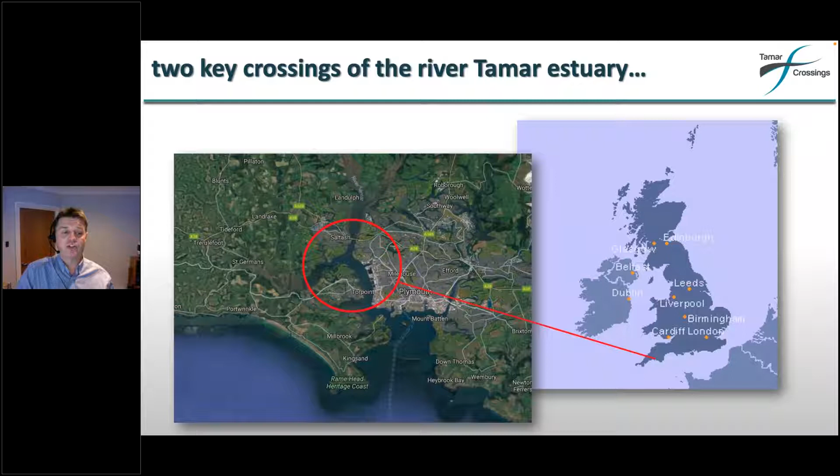The nice thing about people attending virtually is you're probably stretched across the country. So for those who don't know where we are, we're in the southwest of England, on the outskirts of Plymouth, right on the Devon and Cornwall border. The bridge is on the upper reaches of the Tamar, runs between Saltash and Plymouth, and forms part of the A38. And then the Torpoint ferry is further south and links very nearly the city centre of Plymouth with southeast Cornwall. Both really important crossings of the river locally.

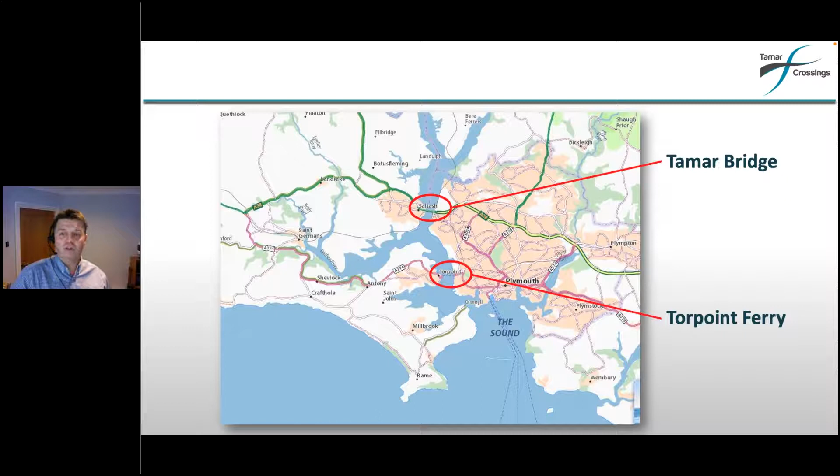The next nearest crossing is probably 6 or 7 miles upstream, which is a 14th or 15th century stone bridge. Can't really take HGVs or the volume of traffic that the A38 or Torpoint ferry can. So locally, very important crossings. There's some statistics. Tamar Bridge will take about 16 million vehicles a year. Income from tolls, and we'll talk about that in a minute, is nearly 10 million.

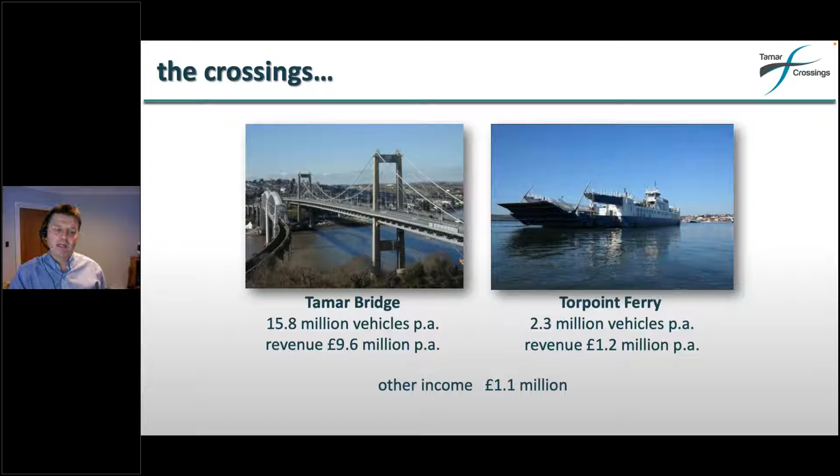Torpoint ferry, about 2.3 million vehicles with thousands of foot passengers and cyclists, and revenue is about 1.2 million a year. We believe the Torpoint ferry is certainly the busiest inland waterway in the UK, potentially in the world. We haven't tested that, but it's certainly a very busy inland waterway. Other income is around about 1.1 million.

Now, we're a bit of an unusual beast, really. We are Tamar Crossings, that's what we're known as locally, although we are actually the Tamar Bridge and Torpoint Ferry Joint Committee. That just doesn't quite roll off the tongue as well as Tamar Crossings. We're established under primary legislation, that's an Act of Parliament. The original Tamar Bridge Act was 1957, various changes to that, the latest being 1998, when the bridge was strengthened and widened, and that strengthening and widening scheme required an Act of Parliament to implement.

Now, originally the 1957 Act required the creation of the Joint Committee, and central government essentially wouldn't fund the crossing at the time. So the two local authorities, Plymouth City Council and Cornwall County Council, as it was then, sponsored the bridge, got the Act through Parliament, and that Act required the formation of the Joint Committee to operate the new Tamar Bridge, and it also at that point in time took the Torpoint ferry into ownership, which before was wholly owned by Cornwall Council.

So we're primarily self-funded from toll income. Just going back to the previous slide, there was a little bit of extra income there. That comes from various way leaves and a very small contribution from Highways England for operating part of their network. The income is ring fenced for the operation, maintenance and improvement of the crossings, and those three words are really important, and we'll touch on those in a short while. And it's also worth noting that the ferry operation is heavily subsidised from bridge income, much more expensive to run, but doesn't have the same volume of traffic.

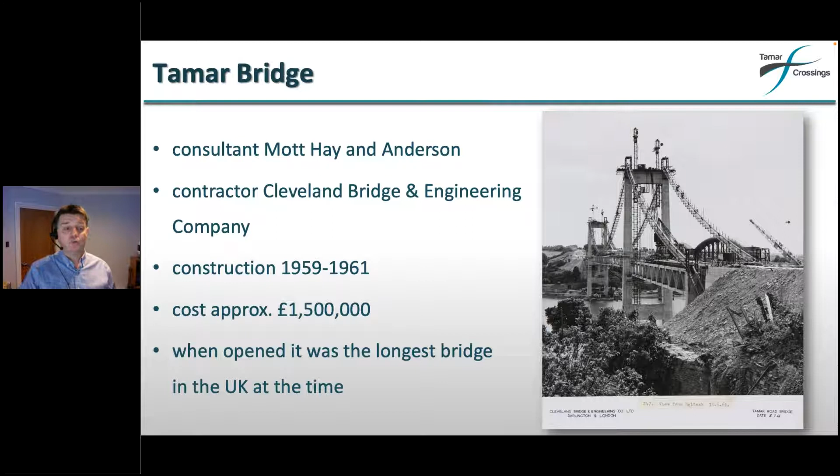Construction cost at the time was £1.5 million, and when it opened, it was the longest suspension bridge in the UK at the time, and certainly one of the biggest post-war projects around. Again, nothing particularly striking about the bridge. It's a fairly standard suspension bridge. I don't know how many engineers are out there watching, but it's a symmetrical bridge.

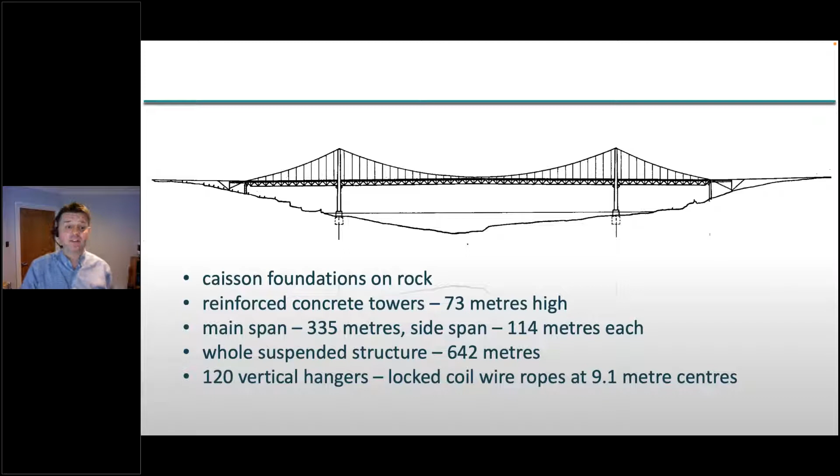Foundations in the river on caissons, reinforced concrete towers, which are about 73 meters high. And then we've got the main spans and the side spans, 335 and 114 meters. And the whole suspended length is 642. So to put that into some context, Humber Bridge, they're about 1,400 meters long, longest bridge in the UK right now. So we're small in terms of bridges, but as I say, it was the longest at the time in the UK, and we still have the same challenges as other bridges around the country.

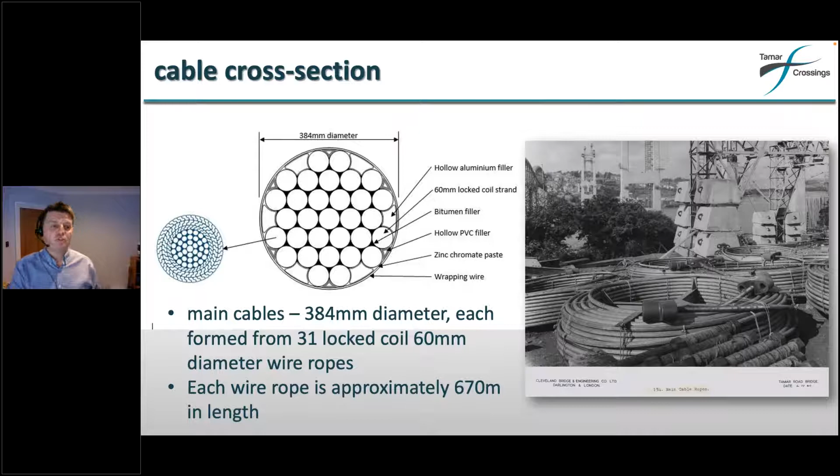Got a slightly unusual cable, main suspension cables, in the way they were constructed. And I've really put this in just for some detail if you want to look at the presentation afterwards, rather than talk about the detail of how the bridge is actually constructed.

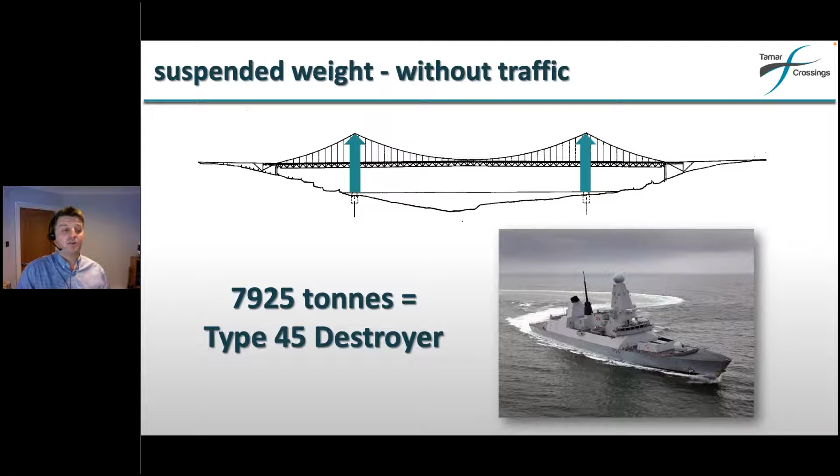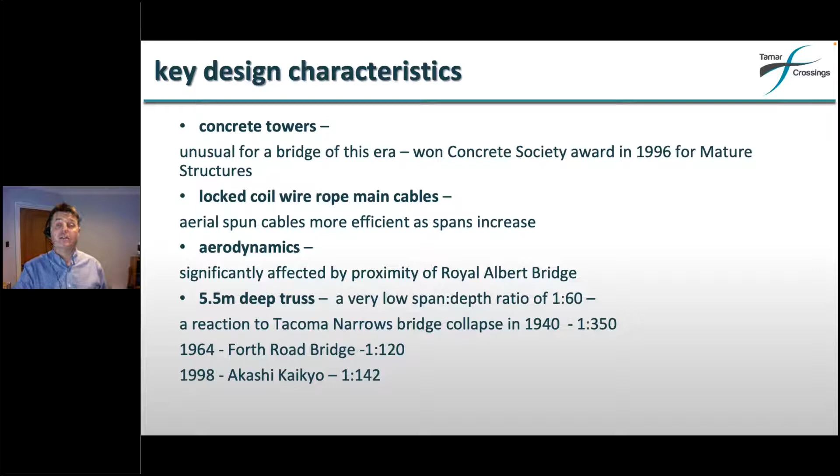And as we're a naval town, very close to Plymouth, with a big dockyard just downriver, that puts the weight of the bridge into context. So we are around about 7,900 tons of suspended weight. That's the weight of the structure hanging from the main cable supported by the towers, which is equivalent roughly to a Type 45 destroyer. And again, I won't cover too much of the key characteristics, but I'll let you have a read through those after the presentation, as well as these photos.

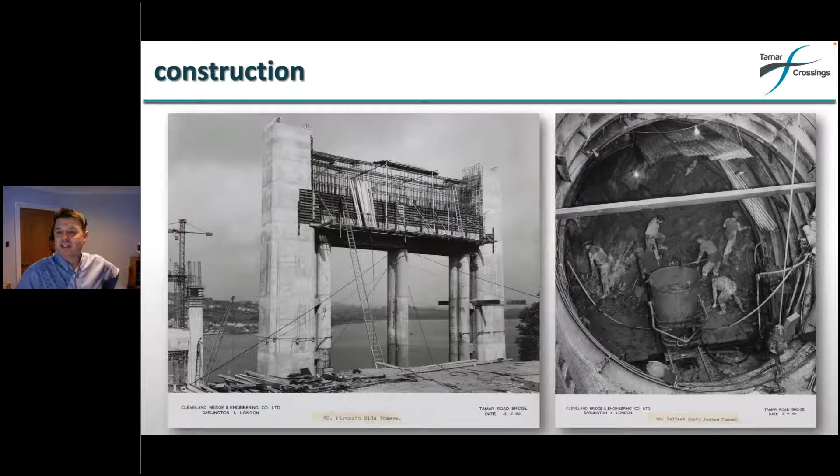Although I do like to put in some old construction photos from time to time. It's good to look at how the bridge was constructed, and it's also good to remind ourselves how far we've come in terms of health and safety. If you look at some of the working practices going on in some of these pictures, it's brilliant. I particularly like this one with the trusses.

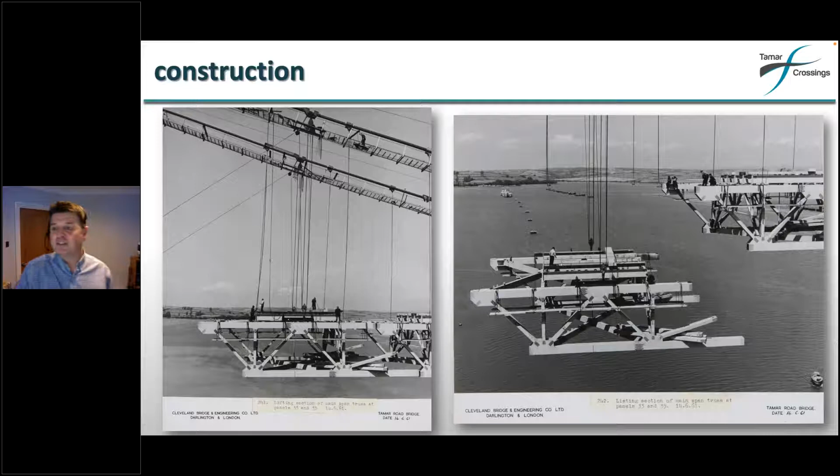This is part of the steel truss being lifted from the river, and you can see the workmen there sat minding their own business, watching the world go by. Flat caps, no harness, no hard hats. You know, it's a fascinating world, and certainly construction has changed enormously since the 1950s. So I'll let you have a good look at those photos yourself in your own time.

So really what we're here to talk about tonight is planning major projects. I'm going to focus on the resurfacing project, but really the principles I'm going to talk about in a few minutes apply to all our projects, almost regardless of the scale and size of them or duration.

But like I say, we'll focus specifically on the resurfacing, which is our most recent project in 2021. We'll look at the project life cycle, just look at some of the project management, which is what you're really interested in, particularly in terms of civil engineering. Look at some of the challenges faced, and hopefully there were some highlights and some successful parts of the project.

But I thought in preparing for this, I should look at what a project is, because we often talk about projects, but what are they? What do they mean to you? What are they to me? And for me, this is how I define our projects. It's something that's not a routine business operation, and it's certainly separate from our normal everyday business activities. Normally, because we require funding, we'll need a very sound business case, and we'll need to be getting separate budgets or separate funding for those projects, and that's quite a key aspect for us.

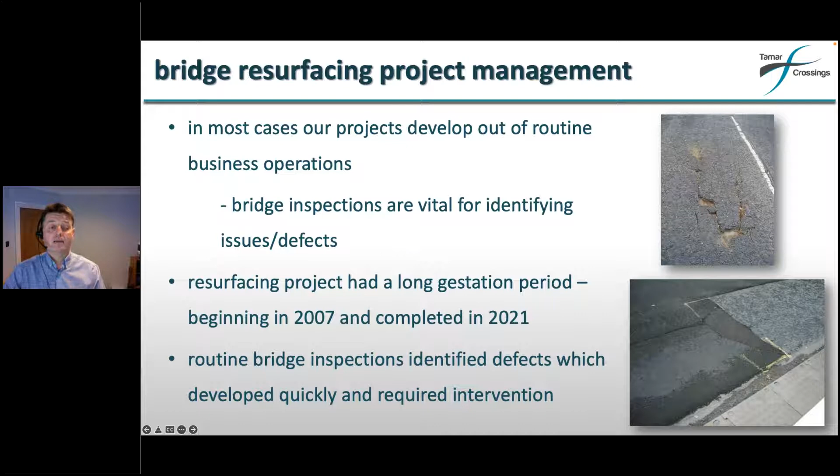So once we realised we're not keeping up with maintenance and we need to do something about the surfacing on the bridge back in 2007-8, we had to develop a strategy, and that was to maximise the life of the existing surfacing materials, in simple terms. So that's making the most of what we've got in place. That means we're spending the least amount of money. We're not wasting resources, very important these days. And we were thinking about that back in 2007. So we developed a phased approach to resurfacing the bridge.

We carried on inspecting and testing the existing materials, trying to determine what life was left, how long the existing materials might last. And then in 2011, we resurfaced the very worst area of the bridge, which was the Plymouth side span. And that allowed us to trial materials and processes for when the remainder of the bridge required resurfacing. That was a really good process for us, and it allowed us to monitor the performance of the trial materials over a long period of time.

And when we came to resurface the rest of the bridge, we were able to refine our material designs and specifications. And while that was happening over a number of years, we were able to consider stakeholders, risk, cost, sustainability, and the impact on users and on the bridge structure itself. By leaving the bridge deck in a more worn state, what effect does that have on the overall bridge performance?

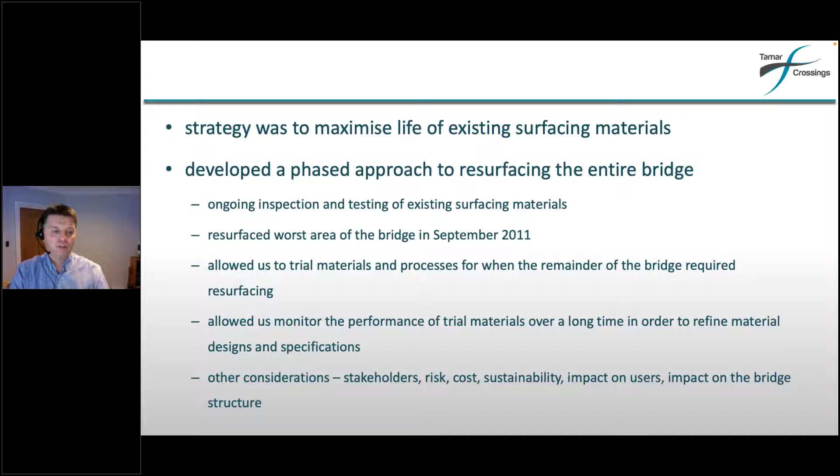One of the reasons we don't always jump in with both feet, particularly with the resurfacing, to resurface a whole bridge back in 2007: at that point, the surfacing material was only 7 years old, and it's very hard to justify going to the expense of resurfacing the entire bridge when not all of it needs doing.

Our governance is really quite onerous. We've got 2 masters to serve, we sit in the middle of both of them, they've both got slightly different processes, and we have to comply with both. Occasionally one says yes, one says no, and then we're stuck in the middle. But all of our projects have to be supported by a sound business case with cost benefit analysis, project programme, and detailed budget requirements. All that has to be planned and presented when we go through our governance processes.

Essentially, we propose things to our joint committee, they approve them, and then they have to go through Plymouth City Council and Cornwall Council, their cabinets and their full councils. So it's a pretty detailed process with some rigorous checking of budgets. And on top of that, just to deal with the procurement, we also have to go through Cornwall's Investment Capital Board, and that enables us to go out to tender to get contractors on board for the work.

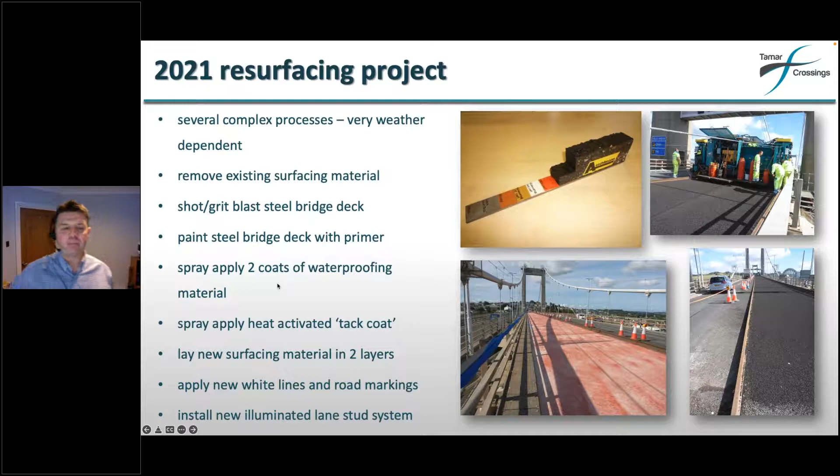lay two layers of tarmac, and then apply white lines, road markings, and the illuminated studs. That all sounds pretty simple, but when you're doing it in a very process-driven way, every part of that process is weather dependent. The only part that isn't really is laying the second coat of tarmac. But other than that, it's all affected by weather.

Some other practical considerations then when we talk about giving the contractor constraints: where he can work, where he can't work, when he can work. That again is developed by us, and again, coming back to these three constraints: balancing time, cost, and likely delays and disruption. And in order to give the contractor enough time, enough space to do the work, we have to balance the availability of traffic lanes and his work area.

So there's areas of conflict there, particularly between engineering and our operations team, because the operations team are basically interested in getting vehicles across the bridge, across the river, and there is sometimes a difference of opinion on what the best way to do that is. But with the resurfacing works, this is what we came up with: some working areas for the contractor.

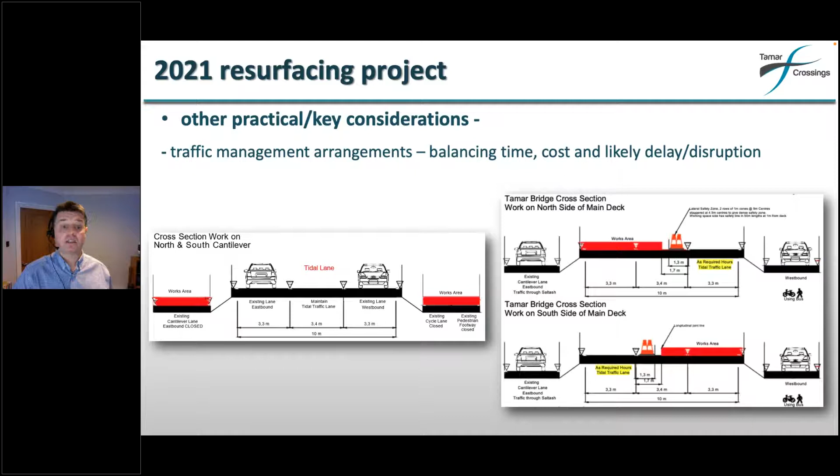In doing that, unfortunately, we lost our pedestrian cycle path on the south side of the bridge. So we had to run a minibus service. That created more hassle than anything else, I think. We're not a bus company. We're not used to running buses, and our contractor provided that service. But it's just one of the things we have to consider when we're working on the bridge.

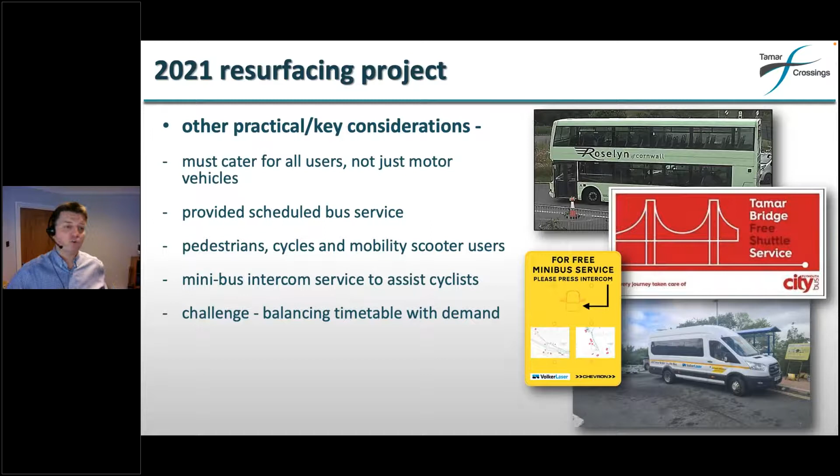What happens to other users? So we don't have to think about just lorries, cars, buses, and where do they go? We have to think about the pedestrians and cyclists as well. And in order for them to cross, we had to provide an alternative means.

Additionally, we had to talk about our project with a huge number of stakeholders. We are a busy crossing, 50,000 vehicles a day, there or thereabouts. We link the A38 trunk road network, and anything we do on the bridge has a significant impact on Highways England's network. As I say, the diversions aren't great. It's a Torpoint ferry or a 15th century stone bridge, which can't take HGVs, and a 15-mile diversion.

So early in the project, stakeholder engagement was key, both in Plymouth City Council, Cornwall Council, with the local authorities there, Highways England, as well as the emergency services, because they need to use the bridge on a regular basis. A lot of ambulances travel from the Cornish side to the largest hospital in the area at Derriford in Plymouth. So we need to be talking to them, discussing with them how to cross the bridge and the impact the work will have on them.

So it's not just what we do. We have a significant impact on those, as well as hauliers, local town council, and those sort of stakeholders. And then further considerations. How do we promote this? How do we get this information out to people? Website, social media, and webcam traffic updates were really key for us on this project.